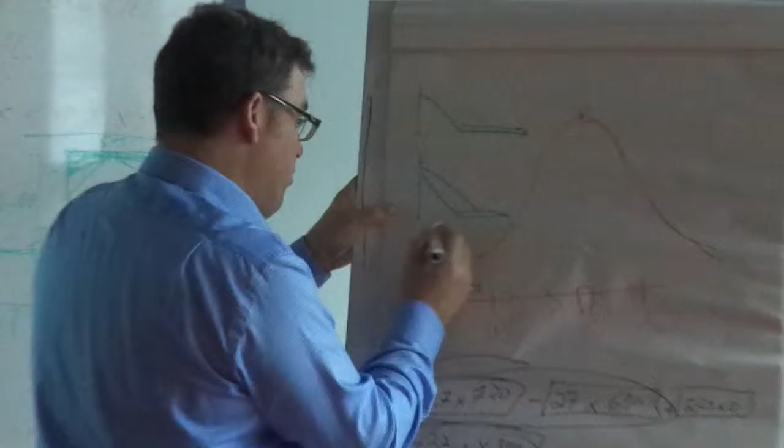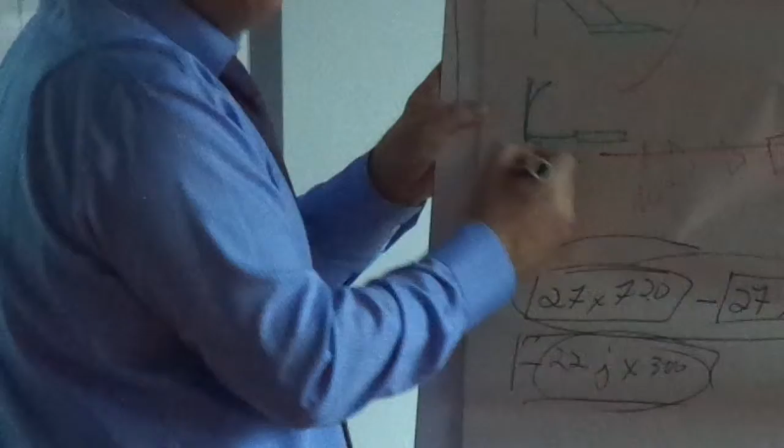When the strut is removed, depending on where your foundation of the building finishes, you can concrete against the wall here, or you put just beams or something to brace this wall, and then you will get a slight deflection here too, but you have a support here, so it's not as big as the normal situation. This helps already a lot.

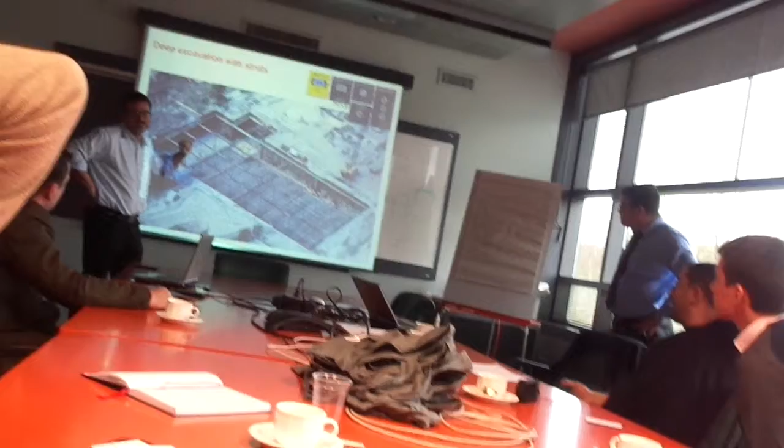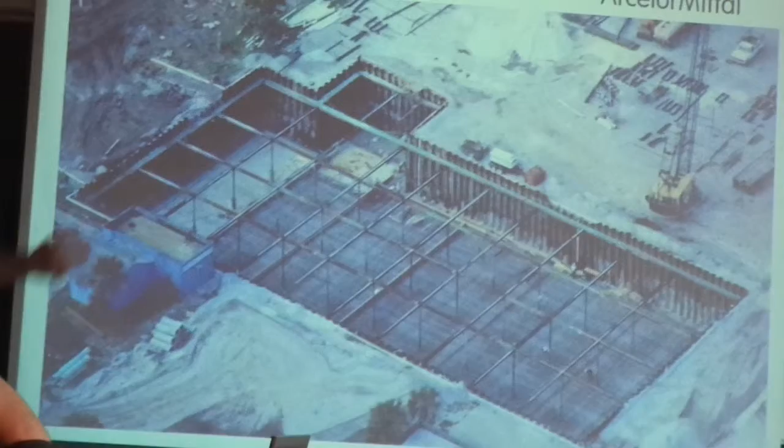They have a system of internal struts. The problem is the distance must be big enough that you can go with your crane inside, so you can put in your construction material. So that's something which has to be.

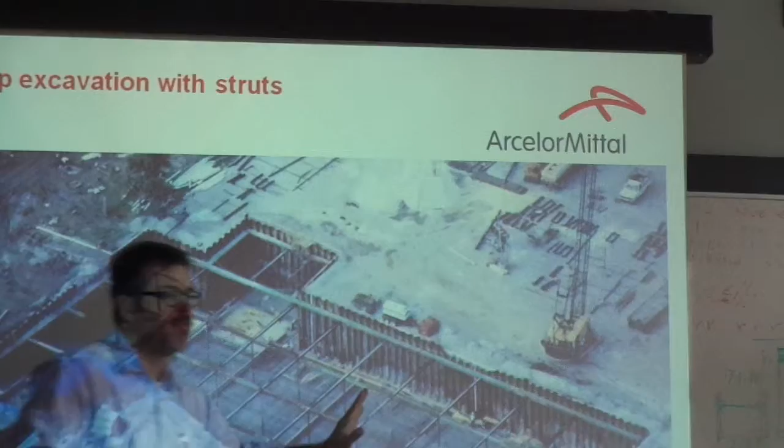We take 45-degree struts and anchor them somehow here. And then on the ground? Yeah, this was on the ground. Yeah. Because the problem we face is that both walls are 70 meters away. So

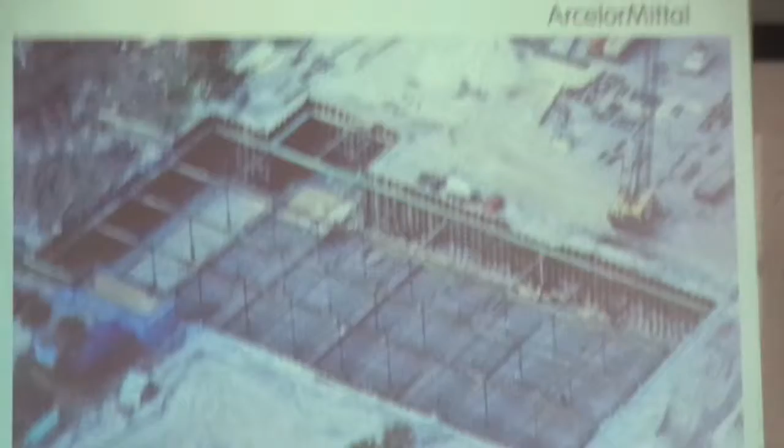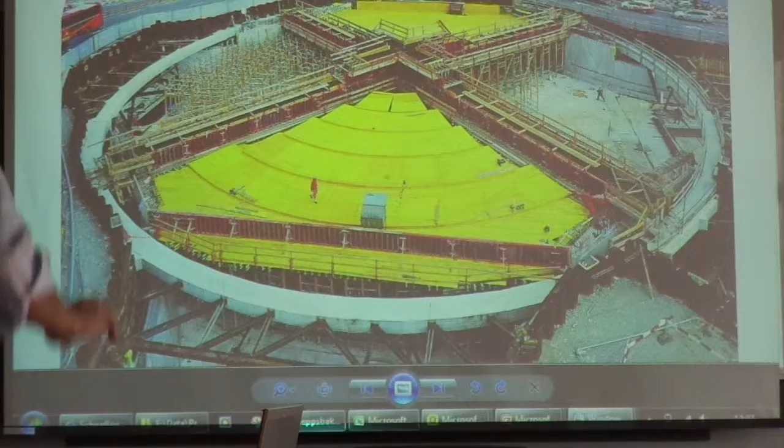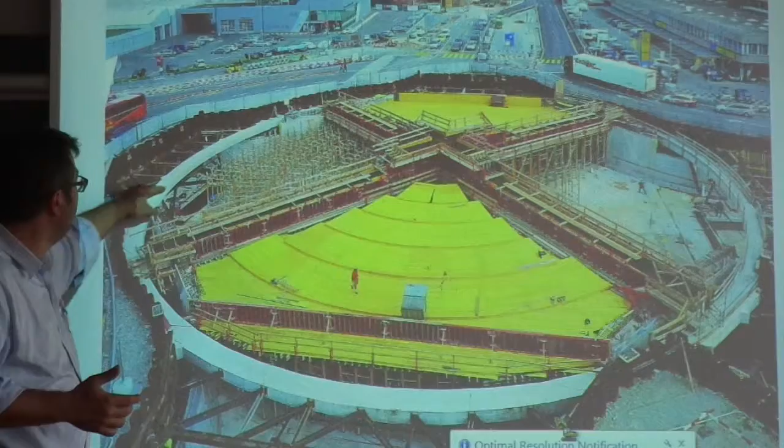Another very nice example is this one that was in Switzerland, in Geneva. Here they had to do a round structure with this, which is nice for the load introduction. No? And here around they also used strutting systems around the main concrete ring. And here in the middle you can work free without any strutting systems.

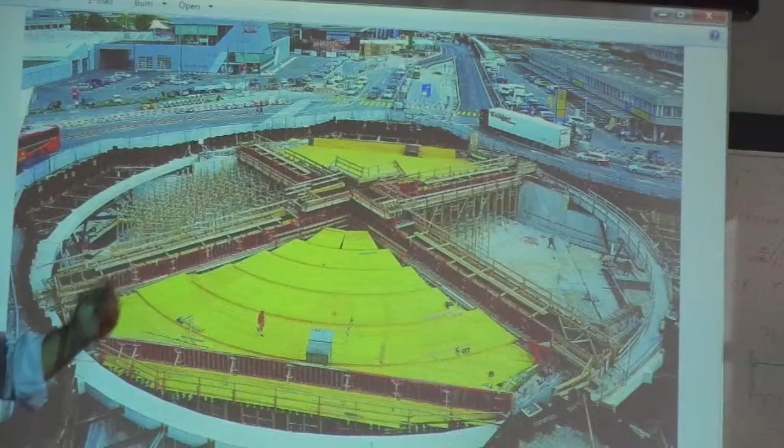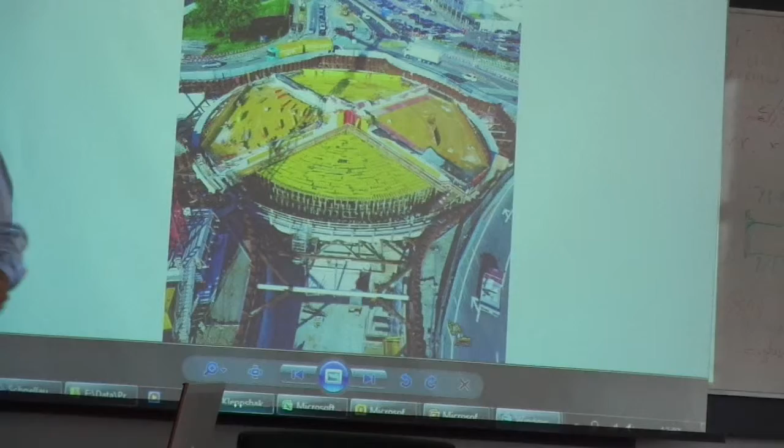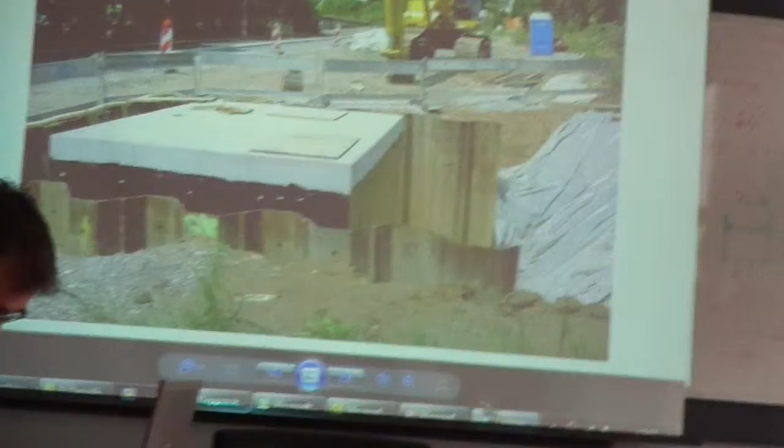You see here stiffener elements. This is also, I would say, 20-30 meters. Yeah, 20 meters maybe. So that's possible, even in inner city areas. So that is something different. Yeah, this is with anchors. That's not an option. What is the other one? Ah, yeah. That's the next thing.

Strutting system in the corners. Sheet pile in the front. But there you need 45 degrees. If not, your load gets too high. But you have an open space in the middle where you can work freely. But you have a lot of pressure, but there we do not have buildings. So it's not a case to brace against. Even better. Then we just can use it this way.

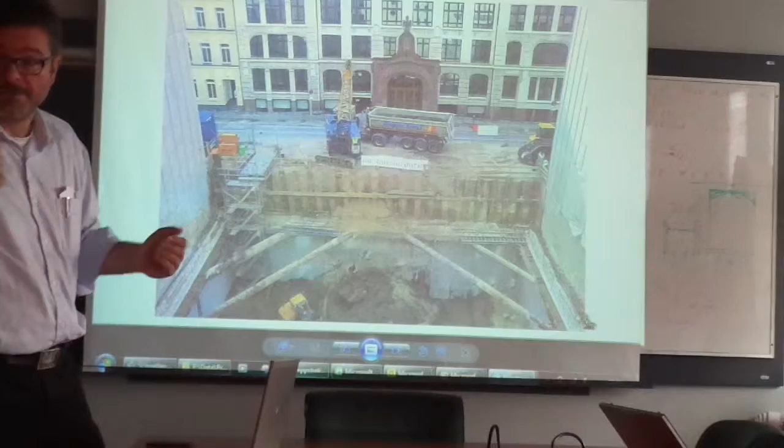That's a nice solution. I have an example of this temporary strutting, I just have to find it. Yeah, so you have one there. Good. We already showed it. But if we cannot work, what you can do is a box pile wall. If you really have restrictions in your deflection, make a box pile. Yeah, but he wants to reuse the piles. Reuse box piles, it's possible. You cannot cut them anymore.

Because you never know where you're going to use these beams. Maybe you will use them, maybe not. Anyway, we can make, for example, two solutions: without beams and with beams. So he can say to the constructor, look, I suggest this one, but if you need more place, you can pay more. You can buy a Mercedes or you can buy a Volkswagen. And he will say, no, I'm sorry, I need that one. So this gives him the opportunity, and this will be the winner.